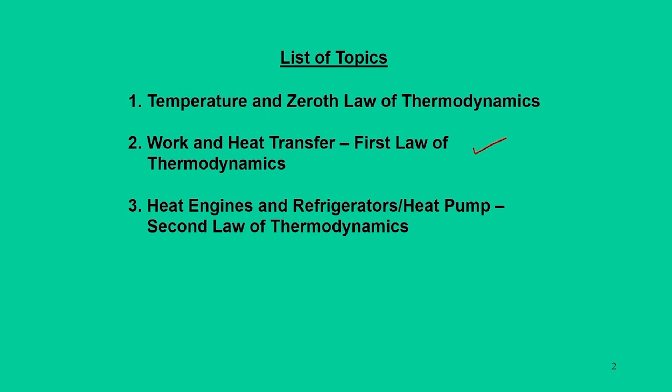Today we will be discussing the first law of thermodynamics, which mainly deals with work and heat transfer. In this lecture number 2, work and heat transfer, that is the first law of thermodynamics, we are going to discuss the following topics.

The first one is the basic concepts of work and heat. Then we will move to the thermodynamic definition of quasi-static process and subsequent work transfer. Then we will move on to generalized equations for work systems, and subsequently how those work equations can be applied for composite systems involving multiple systems and processes.

These are non-thermodynamic in nature. Then, after discussing the concept of work and heat, we will give the definition of the first law of thermodynamics, and with this first law of thermodynamics it gives another concept which is heat transfer, or heat, which is another form of energy. Subsequently to this discussion, we will define some parameters, which is heat capacity and its measurement, and the last segment of this topic is the modes of heat transfer.

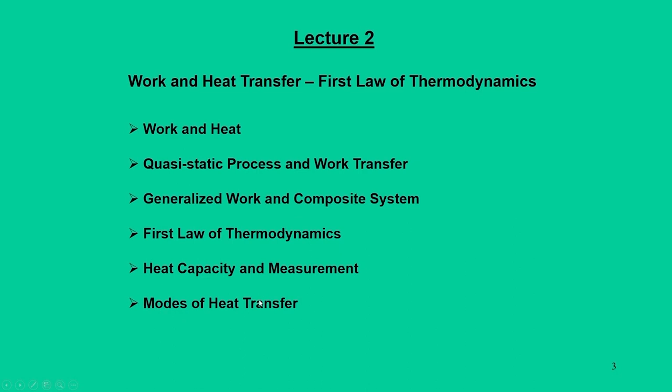Now let us move on. First, we will give the thermodynamic definition of work and heat. We all know that energy interactions in a thermodynamic system can occur in 2 modes, work and heat, and there are some basic definitions which need to be followed if you want to talk about work.

In mechanics, work is nothing but force times displacement, and later on we convert the work to energy. Subsequently, it can be kinetic energy or potential energy.

Sticking to that definition, the thermodynamic sense of defining work refers to the fact that whenever we define this work, we can visualize systems either rising or falling a mass. So in the process of the rise and fall of this certain mass, the potential energy of the system is changed, and that gets transferred in the form of work.

In this work transfer mode, in one sense we say there is a paddle wheel arrangement which is used to change the thermodynamic state of the system, and in this case it may be a liquid inside a container. That thermodynamic state is going to change through this paddle wheel arrangement, when you do some work on this paddle wheel, and that is possible through rise and fall of this mass system.

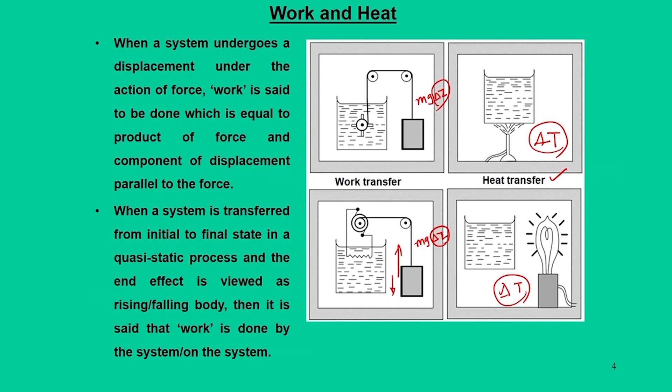Having said this definition of work, we are going to discuss two forms of this work. One is external work, the other is internal work.

In internal work systems, this is mainly applicable for a microscopic system, where there is interaction of atoms, molecules, electrons, and in that case, if work is done by one part of the system to another part, then it is internal work.

But if a system as a whole exerts a force on the surroundings and displacement takes place, then the work is said to be done either by the system or on the system, and it is termed external work. So unless otherwise specified, our viewpoint of work is always external work, and our viewpoint of heat is the part of energy transfer between the system and surroundings by virtue of temperature difference.

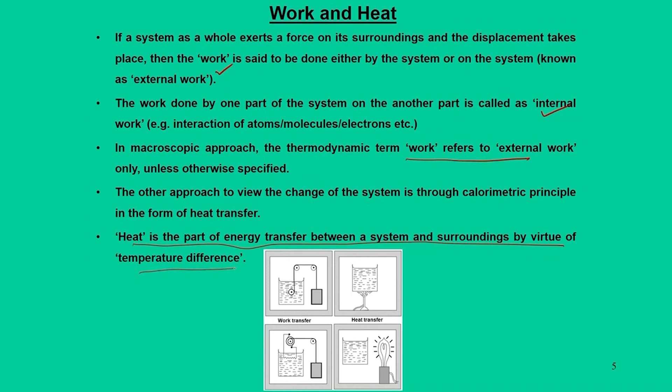Now, with this basic definition, we will move to individual mode of analysis, that is work transfer. The thermodynamic definition of work transfer always refers to the fact that when there is a change of state from one to other, the process can be specified as a quasi-static process.

So in a quasi-static process, what happens? The change of state of the system happens without any disturbance to the surroundings. To have such a quasi-static process possible, we need a thermodynamic equilibrium between the system and the surroundings.

This is possible only when the system exists in mechanical equilibrium, meaning there is no unbalanced force. The system is in thermal equilibrium with respect to surroundings, so there is no transfer of energy by virtue of temperature difference, and there are also no chemical reactions, so the system is in equilibrium chemically with respect to surroundings. If these three conditions are satisfied...

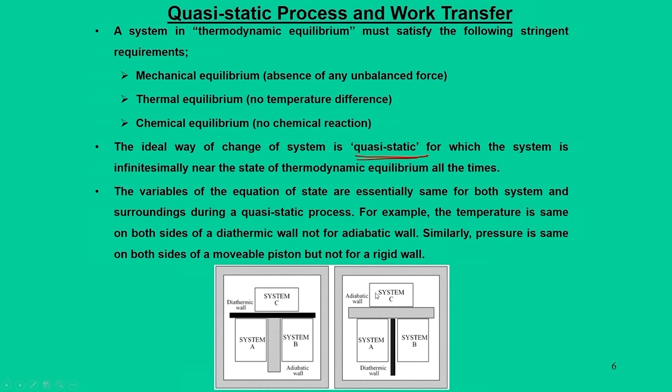Now again, for heat transfer situations, we can recall our previous analysis that transfer of heat is possible only when the multiple systems are separated by a diathermic wall. A diathermic wall means information between the systems can be propagated through heat transfer, but if you put an adiabatic wall, there is no question of transfer of heat or energy in the form of heat. These are the viewpoints in which we are going to discuss more details on work transfer.

Now, when I say quasi-static process, the first basic definition we say is that work is nothing but force times displacement. Here the force can be interpreted in the form of pressure, displacement can be interpreted in the form of volume. That means whenever there is a change in volume and a change in pressure, we can define this in PV diagram coordinates. So quasi-static processes are often referred to in pressure-volume diagrams.

So in a simple system like a piston cylinder device, the piston is moving back and forth within the cylinder. In the process of moving, we can view the system such that the gas which is inside this cylinder gets compressed when the piston moves in the forward direction, and the gas expands when the piston moves in the backward direction.

And we say that if the process occurs very slowly, so that the displacement can be represented in the form of dx, a small displacement for a given force F, then we can view the entire change in pressure and volume of the gas, where the gas at initial state I has coordinates specified as Pi and Vi, and at final state, the final volume is Vf and final pressure is Pf, with initial pressure Pi and initial volume Vi.

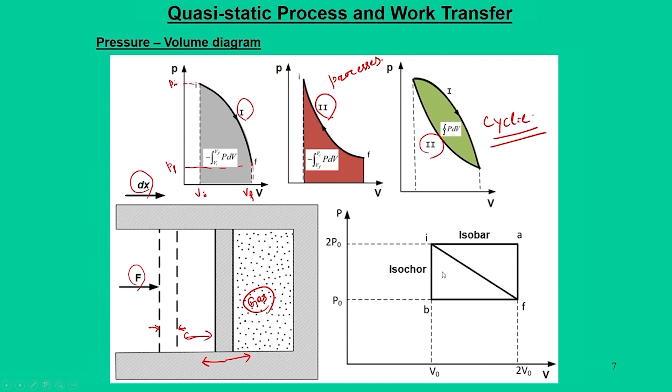Very specifically, we can say that these processes can be defined such that when the pressure remains constant, it is an isobaric process, and when volume remains constant, it is an isochoric process. We also know what an expansion process is - in the expansion process, work is generally done by the system, and in the compression process, work is done on the system.

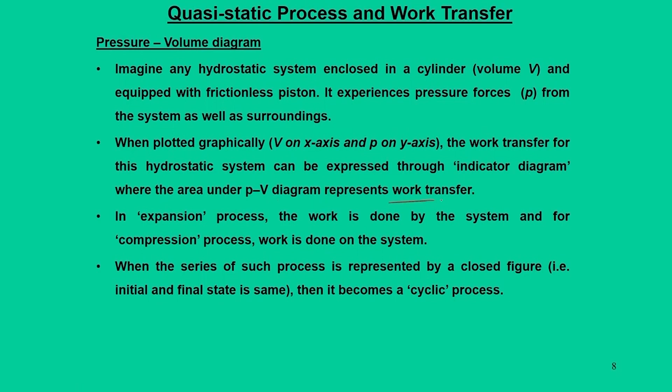Another point I would like to emphasize is that the pressure-volume diagrams, which normally represent the work transfer, are also called indicator diagrams.

So in the same philosophy, we can find out what the work transfer is that happens. Starting from the first basic definition, when a force is exerted through displacement dx, the work transfer - since this is an inexact differential, it depends on the path - dw can be written as P a dx, where a dx is nothing but the volume change.

They can be integrated once you know the relation between pressure and volume. So we can say work transfer can be integrated as P dV when the volume changes from Vi to Vf. In one case the work transfer will be negative - this is the situation for compression - and in the other case, this is the situation for expansion.

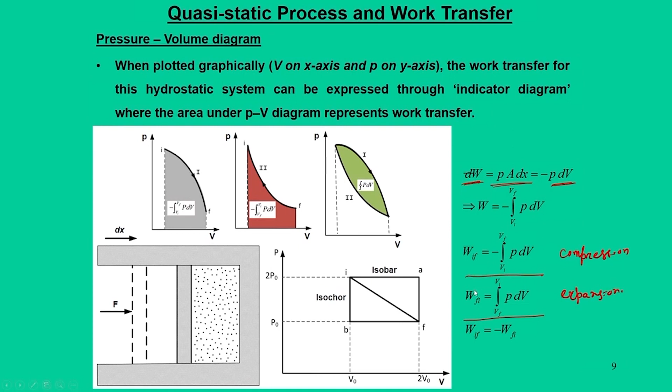In the process of work transfer, the volume increases. Now moving further, this is another angle of representing pressure volume diagrams, where the standard way of representing this pressure volume relation is P V to the power n is equal to constant.

So in the basic thermodynamics course, this is a very fundamental relation, and for different values of n we can say what the nature of the processes are.

They can be isobaric - when you have an isobaric process, that means it is a constant pressure process, so in this case n is equal to 0. Here the pressure is constant, and when you say isochoric process, the volume remains constant, that means n is infinity.

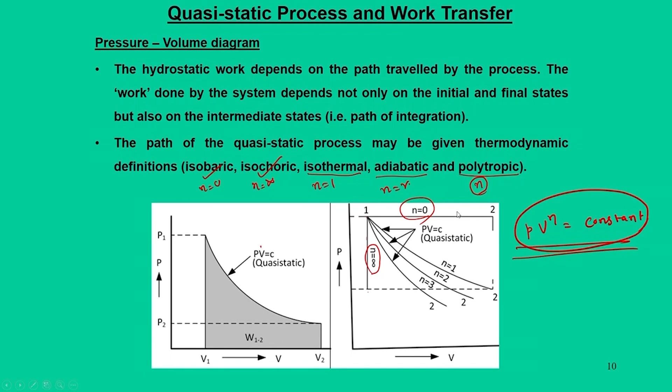And if you say isothermal process, we say Pv to the power n is equal to constant, that is nothing but Pv is equal to RT, so n is equal to 1. When you say adiabatic process, n becomes gamma, and when you have a polytropic process, typically there is a standard number n, which can be any value between 1 and gamma. So this is how we define these thermodynamic processes in our analysis.

So for each case it is now possible to find out the work transfer. For an isobaric process, pressure is equal to constant, so accordingly W12 can be calculated as P into V2 minus V1. For an isochoric process, the integral of P dV is 0.

For an isothermal process, we say Pv is equal to C, and since we have another relation P1 V1 is equal to C, this particular equation can be integrated. There are two forms: work transfer is equal to P1 V1 ln(V2 by V1), or P1 V1 ln(P1 by P2).

Now if it is an adiabatic process, Pv to the power gamma is equal to constant; for a polytropic process, Pv to the power n is equal to constant. In these processes, the general definition we can write is W12 equals P1 V1 minus P2 V2, all divided by n minus 1, which finally can be represented as P1 V1 divided by n minus 1, whole into 1 minus (P1 by P2) to the power (n minus 1 by n). So this is for the polytropic process.

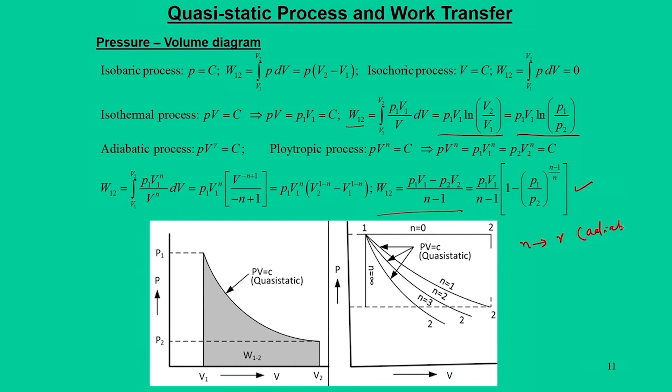Now when n goes to gamma, this becomes the adiabatic process. So this is how we are going to calculate it.

Then moving further, we are going to have another definition, which is adiabatic work. The word adiabatic is normally used when there is no heat transfer, but work transfer when the system changes from state 1 to state 2 is still possible. So in a situation when there is no heat transfer, how can adiabatic work be calculated?

We can say that if you recall our PV diagram, a system goes from initial state I to final state F. A typical or maybe one of the best processes is process 1. Through this process, it can go from one state to the other, and there are multiple ways that initial state point can reach the final state.

So I can go in one line, or I can have another method involving process 3 - I can go from I to A, then A to B, then B to F, or I can have another process, I to C, then C to D, then D to F.

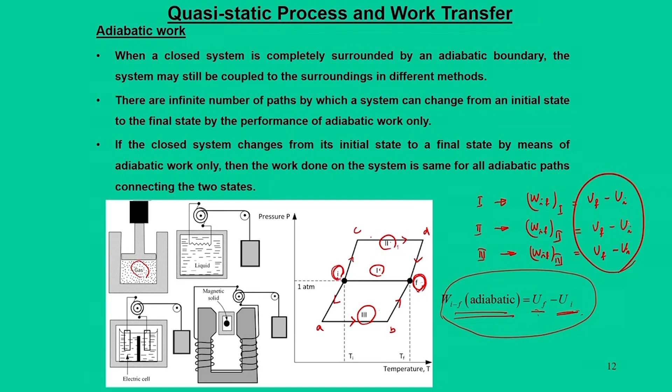So what it means is that as long as the condition of adiabatic nature is ensured, this change in internal energy is nothing but the adiabatic work done. This is the fundamental conclusion we get out of this exercise.

Now when I say internal energy, let us look at its definition. Quantitatively, it is the difference between the functional values of the final state and initial state of the system. So mathematically, it is a functional value between the final and initial states of the system, and because of this we call it the internal energy function. I will explain later why we say function, but the physical interpretation tells us that the increase in the internal energy function is equal to the adiabatic work, and this is the basic definition for conservation of energy.

In fact, when this conservation of energy concept was first realized, it started with finding adiabatic work and then equating it to the internal energy function.

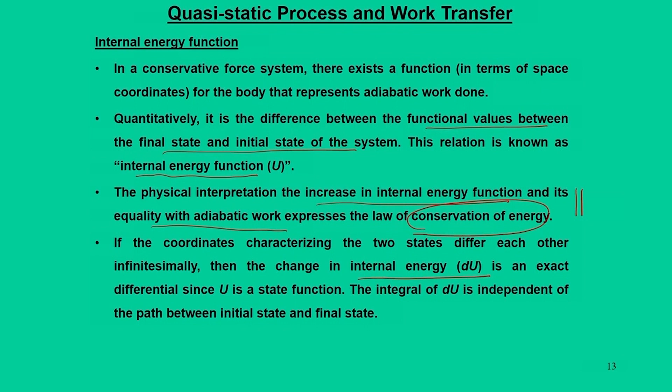So more specifically, from the viewpoint of graphical representation, we see that internal energy is a state function. Although we take different routes, the work transfers in all cases are equal, and when we try to equalize this work transfer with the energy transfer, we find this internal energy change dU remains the same for all adiabatic paths. So it is stated that internal energy is a state function.

Here I would like to emphasize why we say it is a function. Since internal energy is a thermodynamic variable, the ideal way of representing it is in terms of two independent variables. These two independent variables could be either pressure-volume or temperature-volume, since pressure and volume are internally related.

So the ideal way of expressing this: in the first expression, if you say U is a function of temperature and volume, then the exact differential dU can be specified as (dou U / dou T) at constant volume times dT, plus (dou U / dou V) at constant temperature times dV.

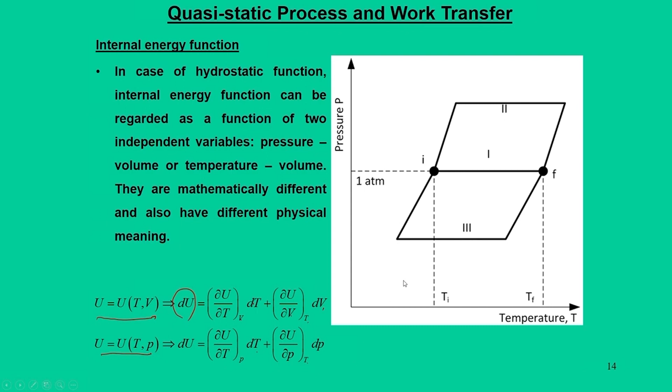Now, if you say this internal energy is a function of temperature and pressure, then dU will be equal to (dou U / dou T) at constant pressure times dT, plus (dou U / dou P) at constant temperature times dP. And because of this reason, we say that internal energy has a functional relation.

Moving further, we are now able to discuss internal energy and work, and we have tried to make correlations, so we have a concept of generalized work. This generalized work is nothing but the thermodynamic definition of work, and for hydrostatic systems, the pressure and volume representation is the most ideal way. This pressure represents the generalized force in the intensive coordinates, where volume is the generalized displacement.

The third parameter, which is also important, is another independent parameter, that is temperature. So a single equation exists, such that two coordinates are independent.

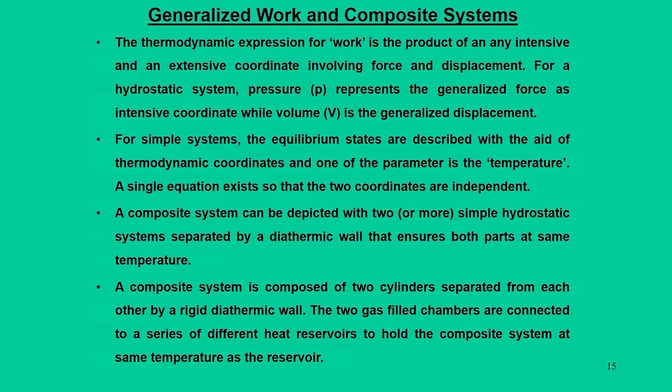We also know that a composite system can be depicted by two hydrostatic systems separated by a diathermic wall that ensures both parts are at the same temperature. Another way of looking at the system is that this composite system can be separated by an adiabatic wall. Through this diathermic wall, there is propagation of energy in the form of heat.

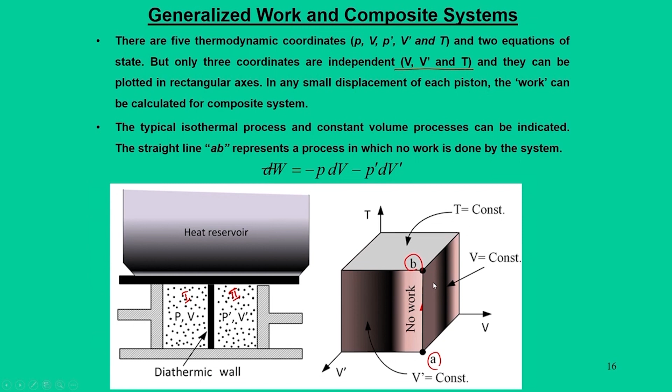So this is how we are going to realize a composite system analysis. Now, having discussed composite systems, we will move back to the discussion.

We are looking at situations when work transfer is possible in non-adiabatic processes. So non-adiabatic processes involve heat transfer, because that is another mode of energy interaction, which is called heat. So it is a non-adiabatic process.

One typical example can be given: again we have the same piston cylinder system where heat is added and we relax the conditions of adiabatic. So it is a non-adiabatic process, and if you try to quantify in this non-adiabatic process what is the change in internal energy and what is the change in work transfer.

In another situation, in a magnetic field, when there is a strong magnetic field experienced by liquid helium gas, we may see that there will be a change of temperature of this liquid helium.

Some of the liquids may also evaporate. So, in situations where adiabatic conditions cannot be ensured, we say it is a non-adiabatic system. If you try to quantify the work transfer and internal energy transfer, we see that this non-adiabatic work is not equal to the change in the internal energy function.

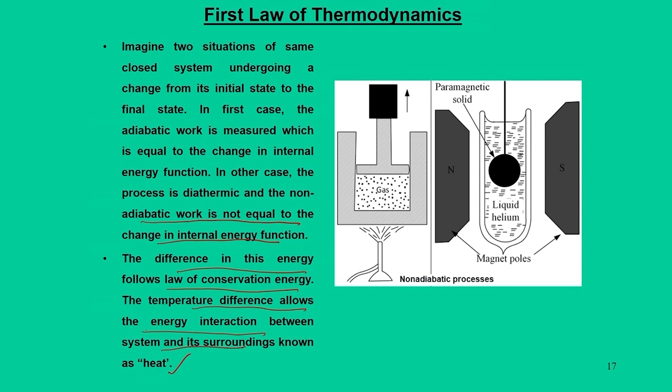With this we will now move on to the definition of the first law of thermodynamics. For a closed system at different temperatures on which diathermic work is done, the energy transferred by non-mechanical means is equal to the difference between the change in internal energy and the diathermic work.

This gives the formulation of the first law, which signifies three aspects. First is existence of the internal energy function, second is conservation of energy, third is heat as energy in transit by virtue of temperature difference.

Based on this understanding, the change in the internal energy function is quantified as the difference between heat and work transfer.

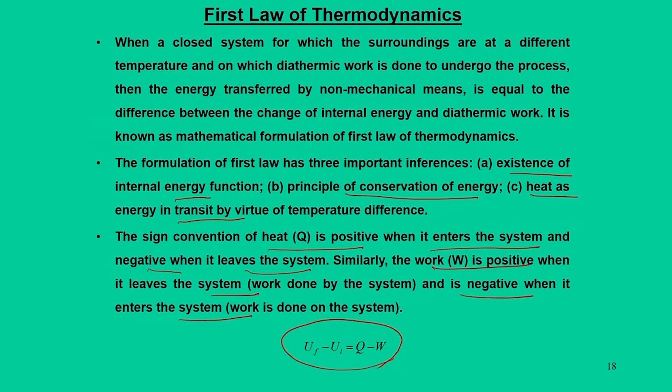We must follow a particular sign convention: heat is positive when it enters the system and negative when it leaves the system. Similarly, work is positive when it leaves the system, in which case we say it is work done by the system, and work is negative when it enters the system, in which case we say work is done on the system.

Now, with these basic definitions, we talk about the first law of thermodynamics for a very infinitesimally small process, in which we represent the internal energy function as an exact differential du, and the path functions are represented by dq and dw, which are inexact in nature. For a hydrostatic system, that means just a pressure-volume system, we say dq equals du plus p dV.

Now, if it is a composite system, that means there is non-PdV work. Non-PdV work involves work transfer by an electrical circuit or through a magnetic field. This is an equivalent amount of PdV work, represented as P' dV'. So in a composite system involving multiple methods of work transfer, the first law is written as dq equals du plus p dV plus P' dV'.

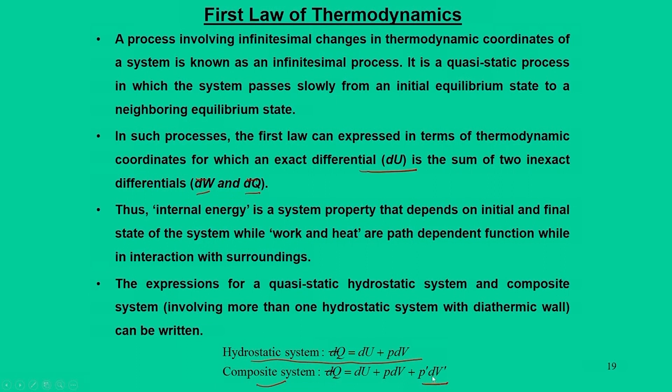The first law of thermodynamics gives the very basic definition of heat, and we will now try to quantify how we are going to evaluate this heat. For that we define a term called heat capacity, and how we measure it. Heat is nothing but a calorie.

Prior to this development, when people used to view heat, they called it a calorie. They used the word calorie for how many calories of heat had been transferred. So in a sense, this calorie is also used as the unit of heat. But subsequently, after the development of the first law, when it was realized heat and work are nothing but different names associated with energy, the concept of heat's definition changed. Both have the same unit, but the viewpoint is different.

Now, whenever there is a change in temperature difference, the energy exchange will take place in the form of heat, and in a hydrostatic system, if the diathermic boundary is such that the volume of the system does not change, then heat exchange is nothing but the change of internal energy.

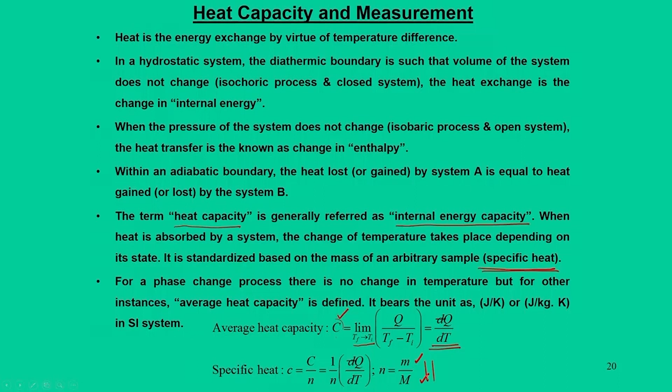Some other basic definitions: heat capacity can be negative, positive, or infinite, depending on the process that undergoes the heat transfer.

Now we are going to give some mathematical interpretation of the first law by including this heat transfer. So we now know what heat capacity is.

We have the first law of thermodynamics, so let us correlate it, and we also know the mathematical relations when a thermodynamic parameter is specified as a function of any other two independent parameters. With these three viewpoints, we now recall how these properties, or internal energy functions, can be found from the first law.

Recall that we have specific heat at constant volume, meaning when there is a change of heat with respect to temperature while keeping volume constant, we call it specific heat at constant volume. When there is a change of heat with respect to temperature keeping pressure constant, we call it specific heat at constant pressure.

With these two definitions, we now recall the first law of thermodynamics, which is dq equals du plus p dv, for a non-adiabatic process.

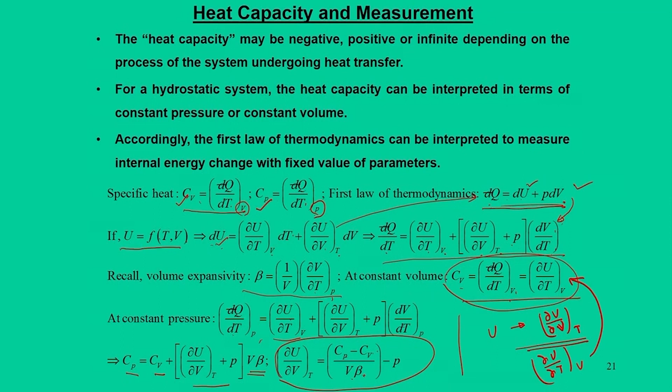So what it says is that the internal energy function, by definition, we can interpret from the first law about the change of internal energy with respect to the independent property parameters, and in this case it is volume and temperature. Then moving further to heat capacity and measurements, we have another concept which in the basic thermodynamics courses we used to call a heat reservoir.

The word reservoir stands for the fact that whenever there is a change of temperature, when you take out any heat from a heat reservoir, its temperature does not change. This we can view like taking some bucket of water from an ocean or river; we do not view any change in the ocean system as a change of mass. Similarly for heat, the concept of heat reservoir is utilized, where we say a heat reservoir is an infinite source of heat from which we can take out heat or add heat.

This heat reservoir concept is very vital in understanding the subsequent law of thermodynamics, that is the second law of thermodynamics.

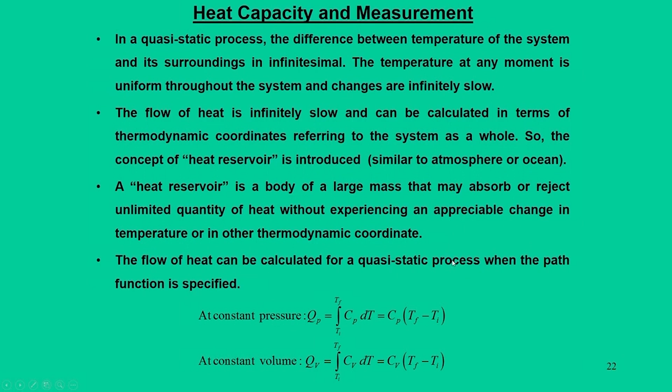Now from the first law principle we can find out the quantity of heat that gets transferred if, by maintaining constant pressure, we write Qp as the integral of Ti to Tf of Cp dt, so Qp equals Cp times Tf minus Ti. At constant volume, Qv is equal to Cv times Tf minus Ti. So this is the quantification of heat in terms of temperature difference.

Now, after giving the very basic definition of heat transfer, we will see what the modes of heat transfer are. We said temperature difference is the essential requirement for transfer of energy in the form of heat, but there are multiple phases of substance. Heat can be transferred in a conductor or solid body, and heat transfer is also possible in a liquid medium or gas medium. Based on this medium, we define heat transfer modes.

So the first mode is nothing but heat conduction. It is referred to as the conduction mode of heat transfer when transport of energy is possible from one volume element to a neighboring volume element through temperature difference. So it is heat conduction, where volume is taken as one parameter.

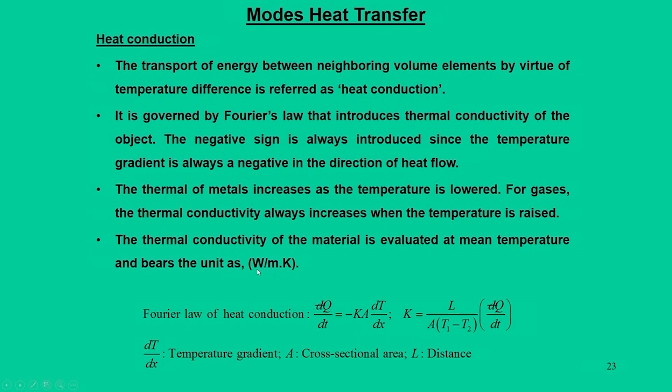Fourier's law of heat conduction is introduced, which talks about this heat conduction mode, represented by the equation dq by dt equals minus K A dT by dx, where it introduces a term called thermal conductivity. The rate of change of heat is proportional to the surface area and the temperature gradient. There is a negative sign introduced because dT by dx is always a negative quantity, since it flows from higher temperature to lower temperature; the negative sign makes this entire quantity positive. From these basic definitions we can find the thermal conductivity of a particular material, and its SI unit is watt per meter into Kelvin.

Moving further, when the medium is liquid, we call this mode of heat transfer convection, and it can also be a gaseous medium. Convection means that by virtue of temperature difference, a convection current is introduced. For example, when you boil water, we give heat at the bottom surface of the container. As temperature increases, density drops, so the higher density mass comes down and the lower density mass goes up. Through this process the communication of heat happens, and as long as we are supplying heat, this particular motion is called a convection current.

If this convection current is possible naturally, that means without involving any external agency, and it occurs only through temperature difference, then it is natural convection. If the convection current is produced by an external agency like running a fan or pump, then we call this forced convection.

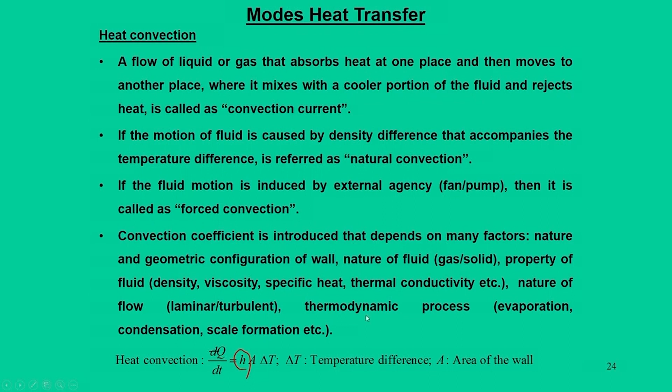The convection coefficient depends on many factors like nature and geometric configuration of the wall, nature of the fluid, property of the fluid, specific heat, nature of the flow whether it is laminar or turbulent, and also the thermodynamic process like evaporation, condensation, or scale formation.

The last part of heat transfer study we call heat radiation. Heat radiation also occurs due to temperature difference, but here no thermometry concept is introduced, meaning the temperature does not fall in the range of gas thermometry.

In this case it is viewed through radiation waves, typically called electromagnetic waves. These electromagnetic waves fall into categories like radio waves, microwave, infrared, visible range, ultraviolet range, X-ray, and gamma ray, and they differ in frequency and wavelength.

While talking about radiation, we characterize it as radiant power. This radiant power is termed with respect to radiation exitance, meaning it is the radiation power that exits from an infinitesimally small surface divided by its area, termed radiation exitance, denoted R, and this value of R changes with temperature.

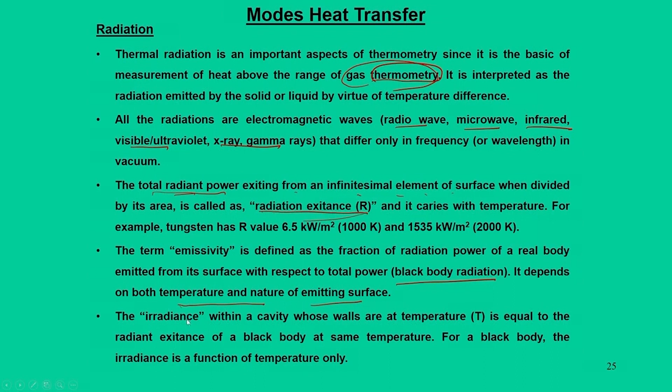To quantify this, the first concept introduced was Kirchhoff's law, which says that radiant power or radiant mode of heat transfer dq by dt is equal to A epsilon times the radiant power of a black body at temperature Tw, and the radiant power of a black body at any other temperature.

This particular expression was a bit complicated, and it was further simplified using Stefan-Boltzmann's law, where the radiant power was quantified as proportional to the fourth power of the temperature. So we can rewrite Kirchhoff's law as Stefan-Boltzmann's law, which is most widely used now: dq by dt is equal to A times epsilon sigma into Tw to the power 4 minus T to the power 4, where epsilon is emissivity, R is the radiant exitance, A stands for the area of the non-black body, and sigma is the Stefan-Boltzmann constant.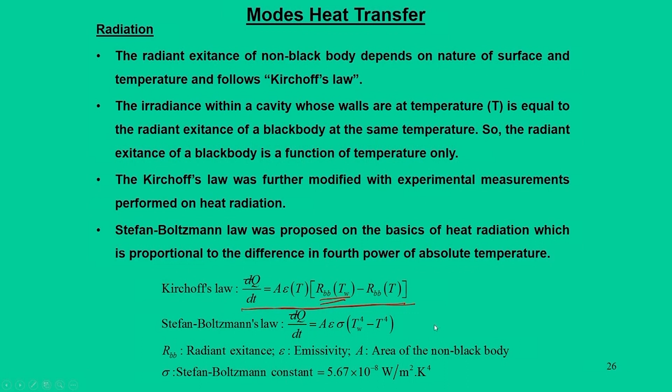So, with this I have come to the end of this particular lecture, where we have introduced the important concepts of work, heat, internal energy, and subsequently the formulation of the first law. So, the first law gives the indication of internal energy, enthalpy, and the quantification of internal energy as a function; the functional form of internal energy can be evaluated from the first law mathematically.

Now we will try to solve some very basic problems as far as work transfer and heat transfer are concerned. The first problem concerns a situation when there is a change in velocity, and the change in velocity is associated with a change in kinetic energy, and how that kinetic energy can be related to work transfer thermodynamically.

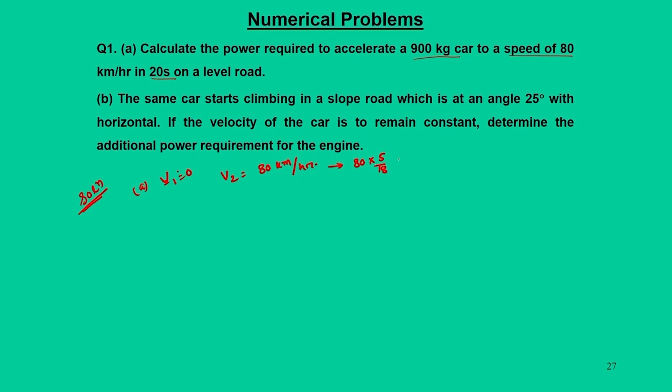The first problem says we have to calculate the power required to accelerate a 900 kg car to a speed of 80 km per hour in 20 seconds. Initially we can imagine the car is at rest, so V1 is equal to 0, and V2 is 80 km per hour, which can be changed to meter per second: 80 into 5 by 18 meter per second, which turns out to be 22.2 meter per second.

The rate of change of kinetic energy we call power, W A, which is half m into V2 squared minus V1 squared, and V1 is 0 here. So this turns out to be half into 900 into 22.2 into 22.2, which turns out to be 22.2 kilojoules, and this much work we have to use in 20 seconds.

So power requirement P A would be W A by time T: 22.2 by 20, so it is 11.1 kilojoule per second, or kilowatt. So P A would be 11.1 kilowatt.

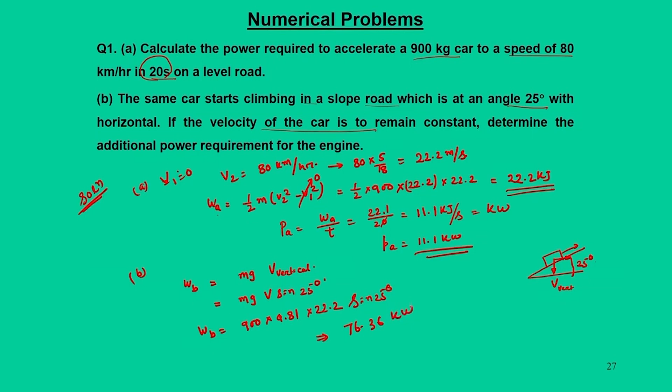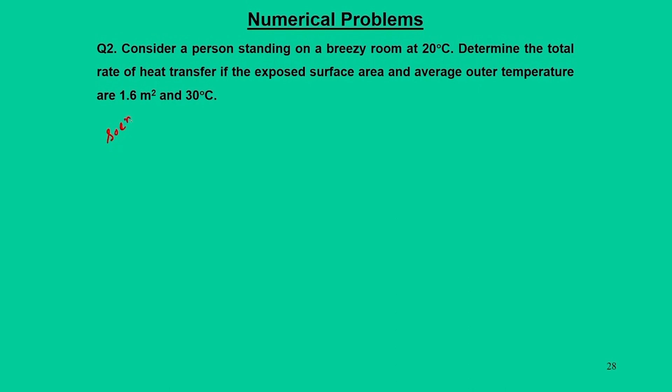Okay, the next problem is about heat transfer. We are looking at a person who stands in a breezy room, meaning there is a breeze of wind, and this room is maintained at 20 degrees centigrade. We have to calculate the heat transfer if the exposed surface area and the surface temperature are given, with the outer area temperature being 30 degrees centigrade. The first thing to understand is what are the possible modes of heat transfer from the person: Q convection plus Q radiation.

Q convection requires H A delta T, and delta T is known: 30 minus 20, which is 10 degrees centigrade. Area is 1.6 meter square, and we have to assume a convection heat transfer coefficient; a typical number can be 6 watt per meter square for this kind of situation, assumed for a normal temperature breezy wind natural convection value. So Q convection equals 6 into area 1.6 into delta T of 10, which gives Q as 96 watt, that is convection.

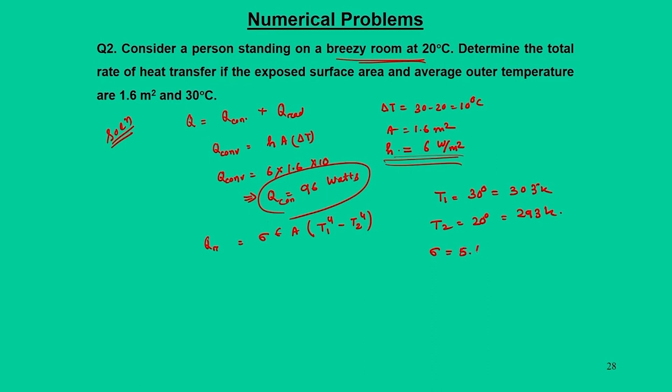The other part, radiation, can be quantified as sigma epsilon A times (T1 to the power 4 minus T2 to the power 4). If T1 is 30 degrees centigrade, that is 303 Kelvin, and T2 is 20 degrees centigrade, which is 293 Kelvin. Sigma value can be assumed as 5.67 into 10 to the power minus 8 watt per meter square per Kelvin to the power 4. Epsilon for a realistic human body emissivity could be 0.95, and area is again 1.6 meter square.

By putting this in we can quantify radiation heat transfer as 66 watt. So total heat is 96 plus 66, which is 162 watt. Of course this number is very small, which we normally do not realize, but still convection and radiation heat transfer at room temperature is possible.